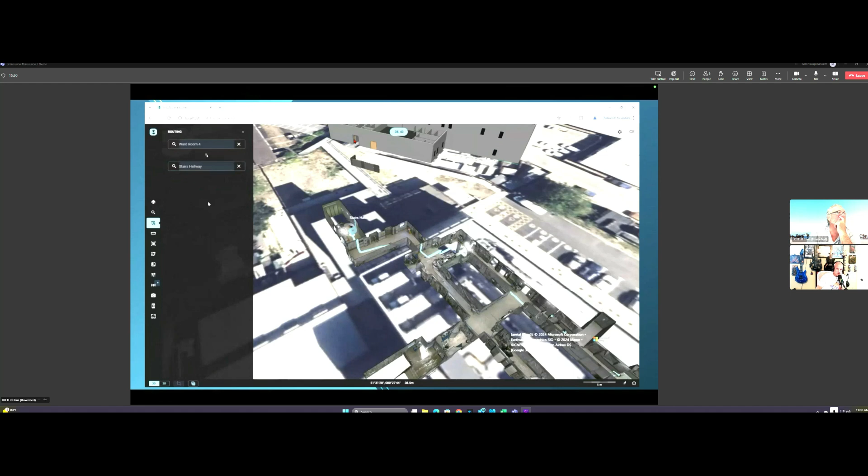So it looked like what you've done is taken the video image and overlaid it on what the LiDAR image was to create that model I just saw. Yeah, I'll show it to you in a few minutes. So what we do is create a point cloud LiDAR image, but then we have the Unity 3D engine built into our software. It's the same as what Pokemon Go uses. That's how we get to that 3D level, using LiDAR and 3D.

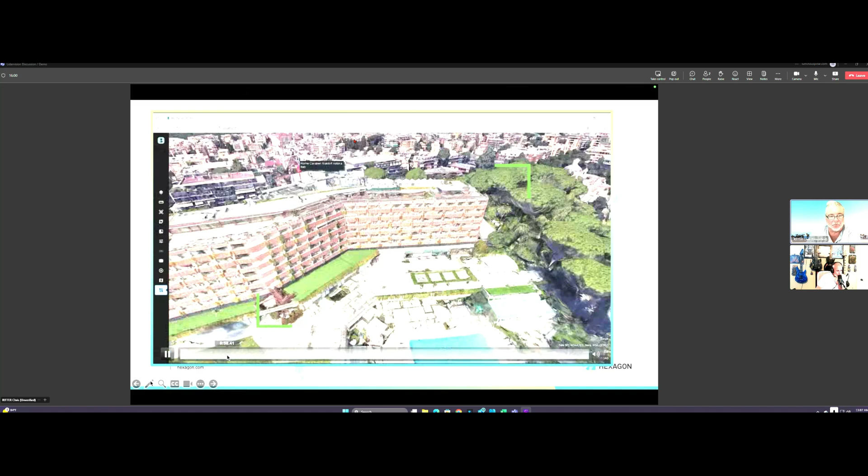And we get into even a higher level, smart sites, where we'll show you a BASF chemical facility. This is pretty neat. This is a BASF chemical plant, I think in Antwerp, that we did.

But this is going to show you not only the LiDAR, but how we bring in 3D. So this is a raw image LiDAR scan of the outdoor facility. And then we get into what we would show you, which would be... Is that what a LiDAR raw looks like? Yes, that's what the raw LiDAR looks like. And this is how we touch it up with the 3D.

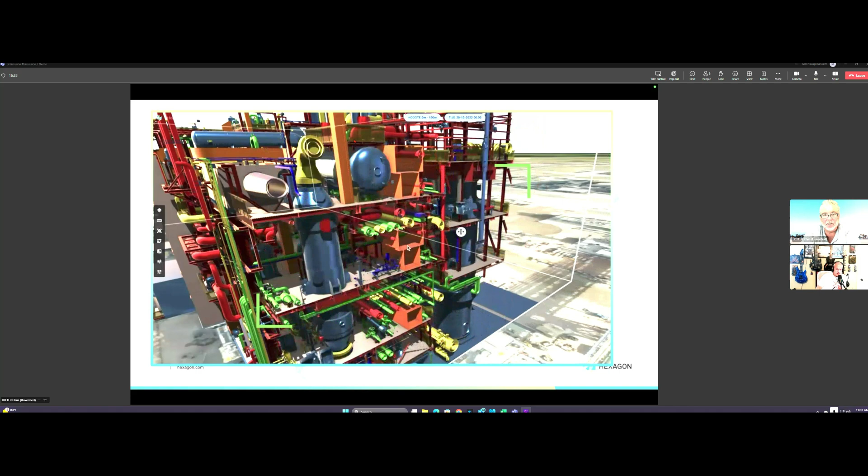So you're saying the raw LiDAR actually gives you an image? Yeah, in essence, actual raw LiDAR does give you an image. That's actually how most LiDAR companies present their solution, but we add the 3D to it.

No, I get it, that's the big differentiator. I've only ever seen it in terms of mapping, like mapping a racetrack for a driving game. Yeah, that's what a raw image looks like. I'll show you a little bit more - just millions and millions of reflection points from the LiDAR, that's it. Okay, that's exactly it, all beams, millions of beams of light coming out.

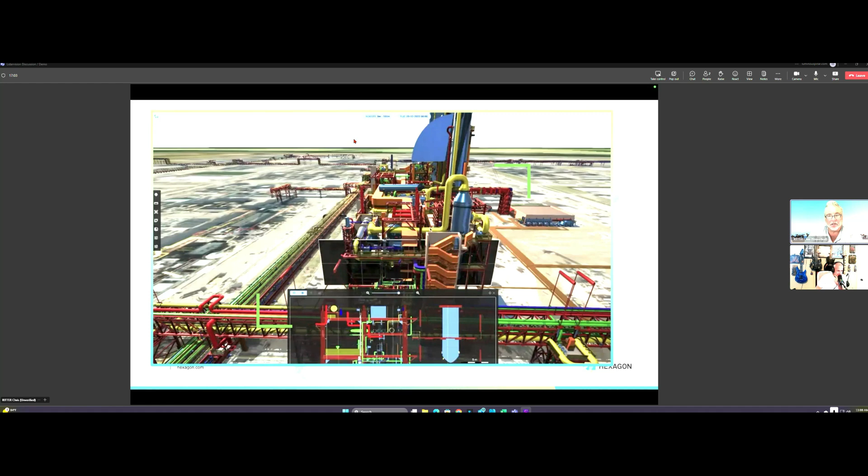And then you overlay this awesome 3D over it, and this is used for more than security - this is everything now: construction, planning, administration, whatever form of data you can bring, I can bring into this map and do this type of thing. You're erasing the plant. Yeah, and then you can pull it back the other way to complete it. This is pre and post.

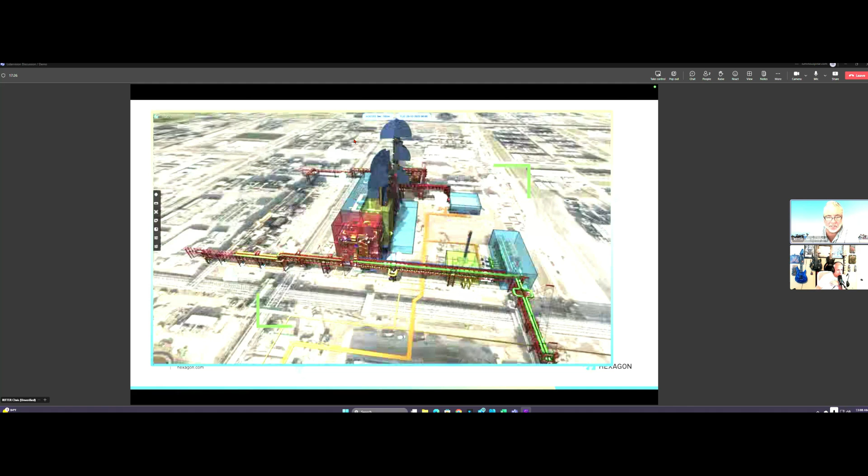So again, this is high end, almost a different division of our LiDAR called smart sites. But let me show you our meat and potatoes product and how we get to where we go with that. So we have LiDAR Vision, it is our LMS - a LiDAR management system. I keep telling people it's about LMSs now, not about VMSs. What makes us different, and what is a little bit about LiDAR.

So again, LiDAR stands for light detection and ranging. These are my features: I can do 3D LiDAR detection with full volumetric alarm, meaning I know with spatial awareness where somebody or something is, by 2 centimeters and up to 200 meters. So anywhere in a 200-meter view, I know where they are by 2 centimeters in height, width, distance, whatever it may be. I bring in the 3D maps to add to the LiDAR using our Unity 3D engine, and then I tie in my virtual planning tool and AI integration with drones, robots, whatever it may be.

Some features with LiDAR you got to realize too is privacy and HIPAA. I can now go into hospitals, bathrooms, or locker rooms and not have any concern over privacy or HIPAA because I'm not seeing a face, I'm just seeing a human. And again, 200 meters by 2 centimeters, and weather adverse - I don't care whether it's snow, sleet, rain, or hail, I'm going to see through it, where video analytics is not going to see through it. I'll send you a link to a YouTube video.

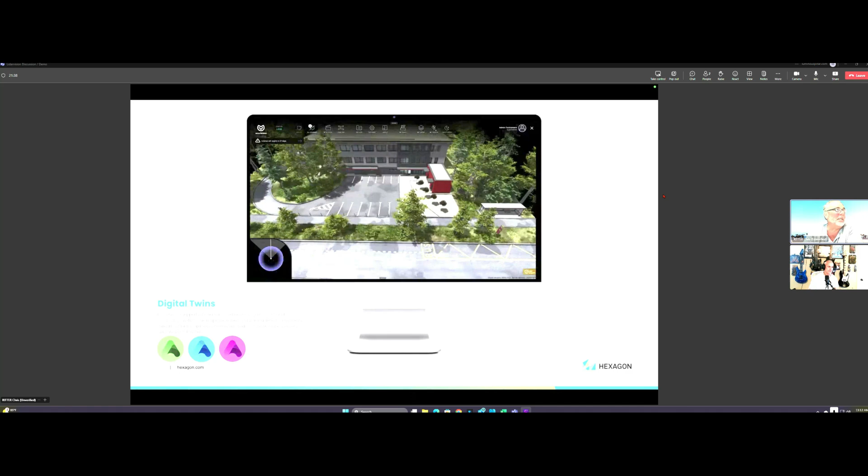So a little bit more of how we get to those digital twins. I showed you before the higher end, we just showed you a couple maps of how we do this. This is a basic setup, like a doctor's office or something like that, so it doesn't have to be a large facility. We go in, we do a scan, but how do we do this? We do it two different ways.

We have a drone, and this is why we can do these services, like I was just talking to the consultant about doing these type of services as well. The drone goes up, we have the software built into the drone, it does a grid like that. And we come down and we create a point cloud. So right here, that would create a point cloud like that. And then we would add the 3D engine to it and start doing the artist rendering.

And depending on how 3D you want, we could just do basic LiDAR or start adding in these high-end graphics like that. I'm doing a couple projects right now with private residences just like this. We showed the integrator, and the integrator's like, great, I got a rich guy that wants this. And man, he gave me a PO the other day to do it. He's like, I want stuff that looks like this.

So you don't have to have all that pretty picture imagery if you don't want to - that is the high end. You can go basic LiDAR, and I'll show you some things on that.

He's walking around now doing an internal LiDAR map. This is internal, so that's how you do it internally. That unit is a Leica unit, it is $60,000. We bring it around to the trade shows with us and scan the show floor and stuff like that. That's what creates that point cloud.

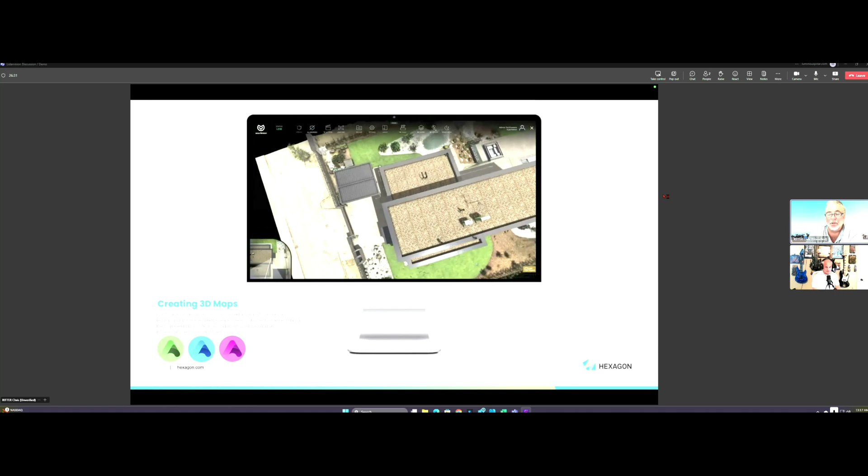So again, we can scan it, we can take Google Earth, we can also take BIM models - we can import any type of BIM and create that 3D. What's a BIM? Building Information Modeling. So most buildings already have them - they have these 3D models already as part of their construction and planning.

Like I was doing a demo for HelloFresh a couple weeks ago, and they were like, 'Oh hey, can you use our 3D maps that we already got?' I'm like, 'Dude, where do you get 3D maps?' Every time their construction company finishes building a new building, they have a guy who walks around with a LiDAR construction helmet and scans the entire building for them. It makes the job easier, and then we import it. Like this one residence I'm working on right now, this is what the guy saw.

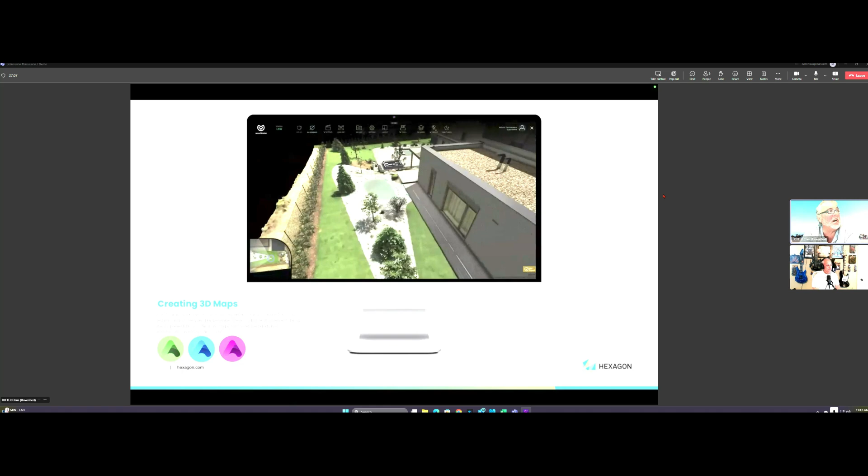Oh, I didn't even know whose private residence this is, but the customer says they want their final result to look like this. And he's got 20 mansions throughout the country.

Yeah, it was crazy. The first one in Pennsylvania I'm working on, they said they have a private art gallery, and we have to put LiDAR protection where the Sally port is, for the armored vehicles to drive in to transport the art to the Metropolitan Museum in New York.

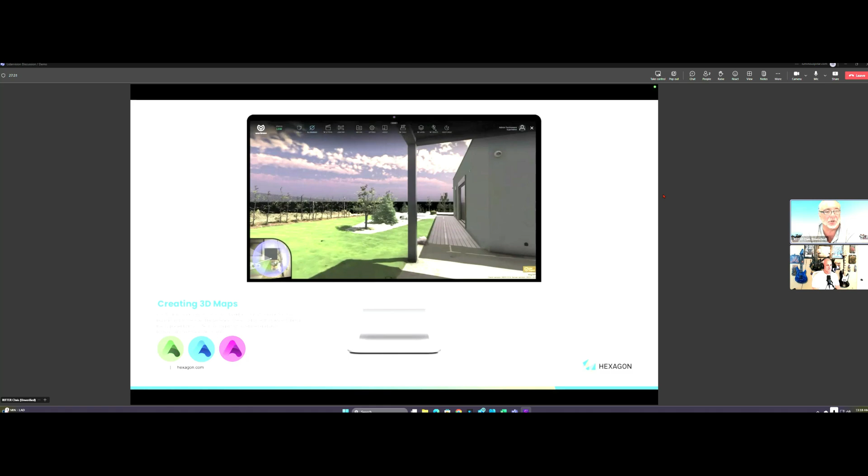Hey, go get Jay Leno's car collection, man, or some other big car collection.

Exactly, man. So the big thing with LiDAR is what we focus on is zones. I make these zones and I can create any type of zone and know who's in it, when they went in it, how many people are in it, how quick they're moving through it, and all types of details and analytics from there.

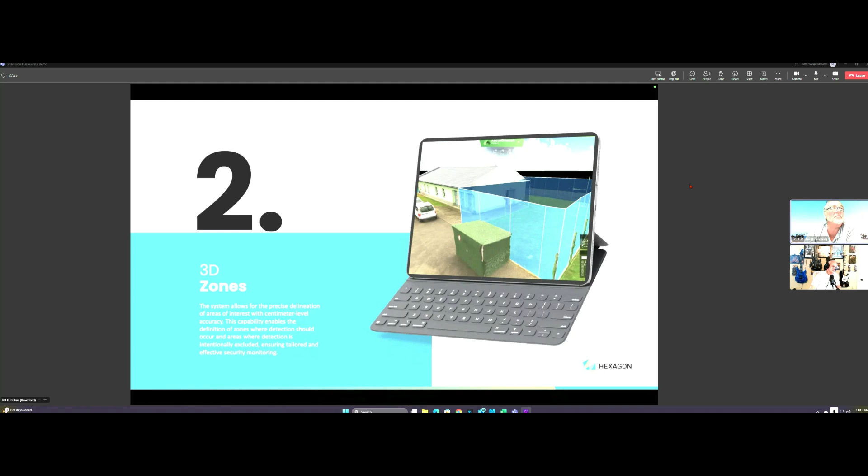Here's a zone we did for a certain customer in New York City where we did cautionary zones. This is the planning tool. Those are fake humans we put in there as the planning tool to test it. We built this line, and by 2 centimeters, I'll know if somebody sticks their finger over that line. Then we did the actual red zone, so we could stop tracks based upon the drop-in zone. We actually did some stuff in Europe where we threw dummies on the track and were able to stop the train and do the whole thing from there.

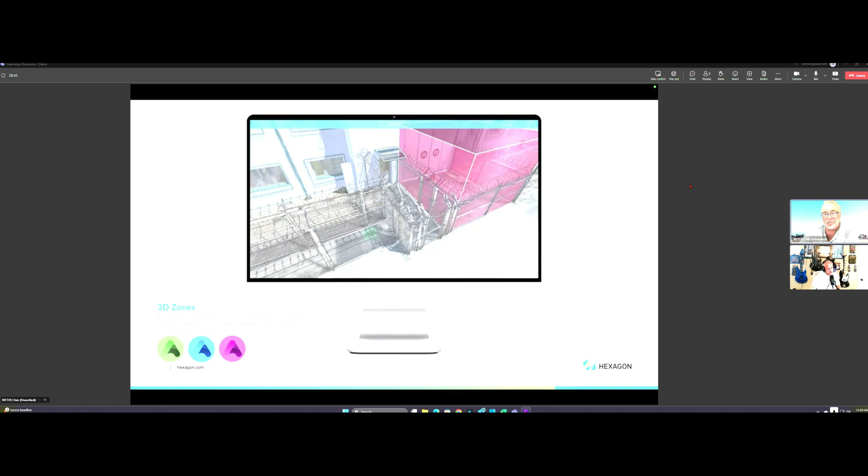So zones are big, and part of that is also doing 3D zones and volumetric detection. For prisons, I can make one zone that tells me when one guy walks in, make this other zone tell me when 20 people walk in, or only tell me if one comes in and 10 more hang in there, whatever it may be.

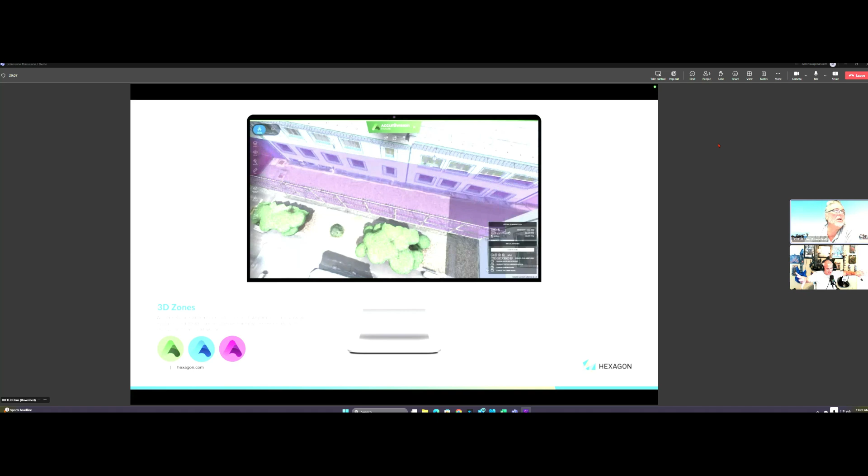And LiDAR can effectively count, right? Yes, it does people counting. The only thing it's not accurate at is a mass gathering together in a crowd. If 100 people glob together in a crowd, it's going to be tough for me to tell how many people are there. That would only work if they were spread out enough that you could get separate reflections on each person. Exactly.

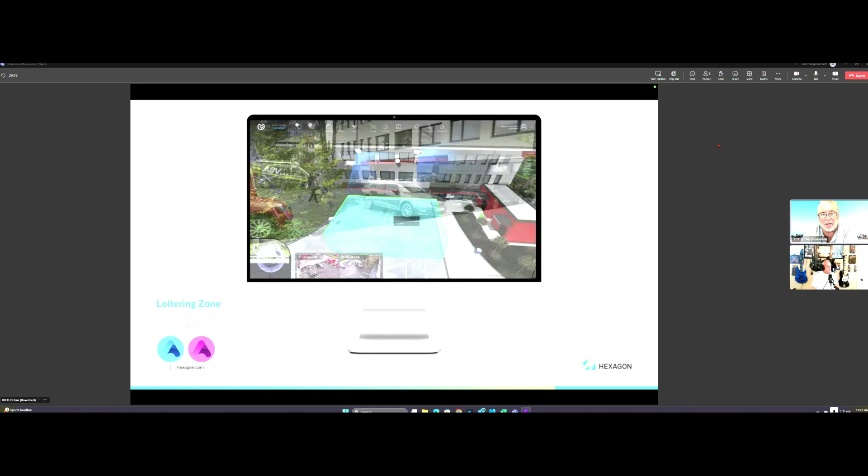Well, right now this is showing loitering zones. I can set up a grid, make that zone, and tell it I don't care if people are hanging outside the zone, but when they're in that zone, I want to know if they're lingering more than 30 seconds, 3 minutes, whatever. I can get real detailed on where they go in that loitering, so I can make that an alarm zone for all moving objects detected.

Then I can get into dangerous proximity zones. This is something I worked on for HelloFresh - tell me how close people are to trucks. When a big truck comes into the parking lot, I want to be alerted if somebody's within 2 feet of them, or if they're hanging for too long within 2 feet of them.

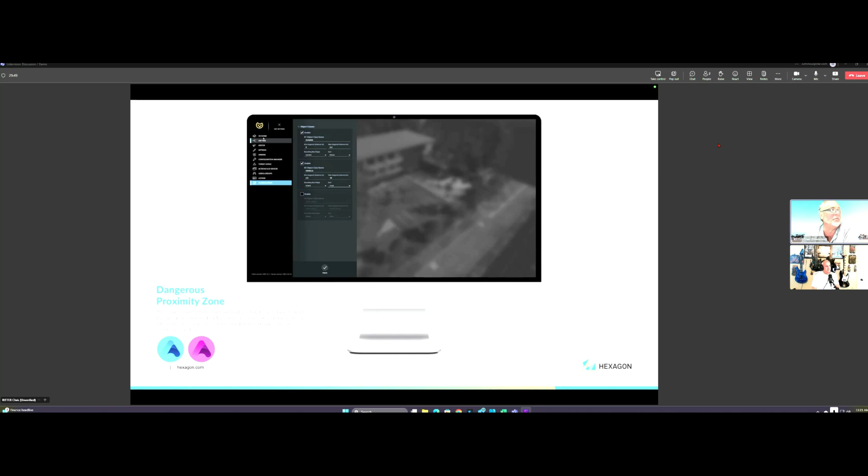So you get into the dangerous proximities, and that means I can layer zones too. Layer them all together - layer 1, layer 2, layer 3.

Okay, get into heat mapping, same thing. I can do dwell times, heat mapping. I'm working on projects right now just for marketing events for the Lincoln Center and the Pittsburgh Cultural Arts Center, for museums. Love this stuff.

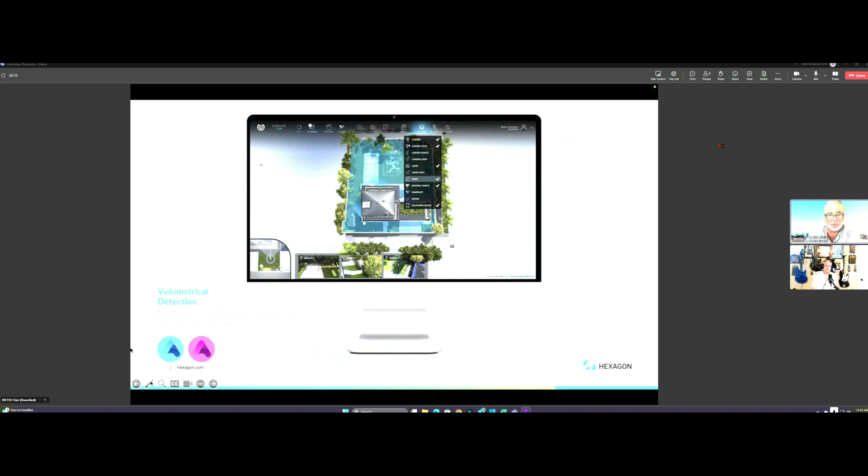Really, the thing is volumetric detection, like I said before, isn't just when they jump the fence, but what happens when they get beyond the fence. So just showing you a setup where somebody breached the perimeter, and somewhere in here we should get a lock on. Yeah, they're coming around the side of the building up there on the top right. This is showing you where they are in the scene, accurate up to 2 centimeters, where they're tracking, where they're going, with live video coordinated with it.

Wouldn't this be a great tool for heat mapping? For example, if you had an art gallery, you could use this to determine how many people go to what exhibit, what's popular, etcetera - based on literally what we're doing here, heat mapping.

For the Pittsburgh Culture Art project, they want to know if people go one way quicker or another way quicker, and how long they sit in front of artwork. Then they can determine where they need to move artwork or how to position it better, for analytics purposes.

I did a project that was never completed with Sam's Club, where they were trying to determine foot traffic through the store. As far as I know, they still don't know. You ought to find a way to talk to them, because we could absolutely do stuff like that.

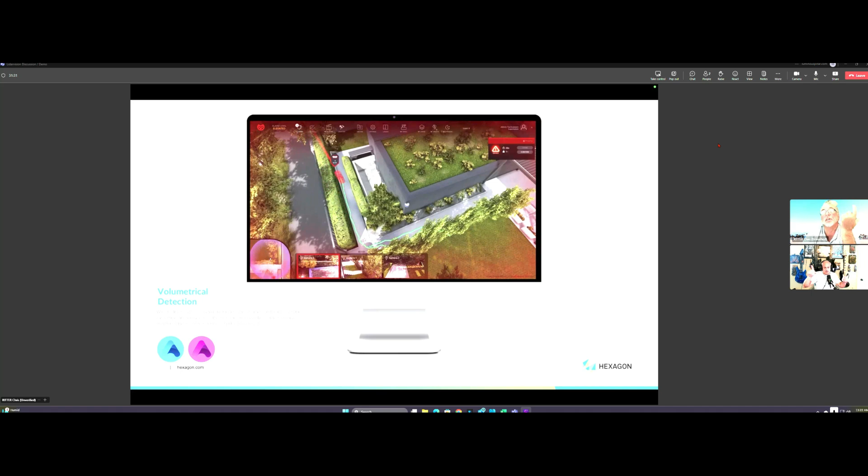They were trying to do foot traffic heat mapping. They don't know if people are going right or left or straight, and if so, where do they go, and how long do they loiter. This would answer all those questions for them. It literally would. And it's cool because it has that privacy too, so if they don't want to be sharing data for security reasons, I can get just pure analytics from it.

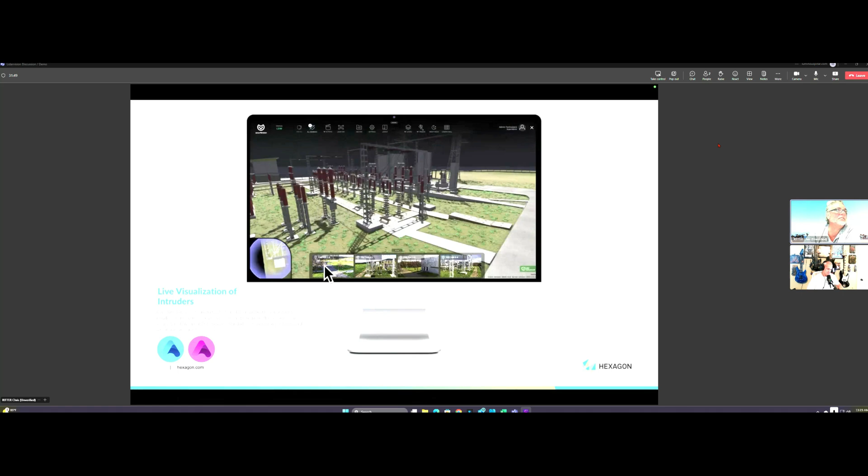Let's see intruder tracking, just a live visualization of what's going on. Then you get into PTZ piloting, so I could do point and click anywhere on the map, and then all cameras follow. Because again, I'm not looking to be a VMS, I enhance the VMS and sit next to any VMS.

I like this one right here, managing a friendly object or access control integration. I got an armed zone, I got a guy walking up in the video. They swipe a card at the gate, that disarms the zone, they're friendly. I got a friendly object in the zone now, we're good.

I got unfriendly or undetermined coming in. They come up to the gate, they don't swipe. Click - got them, I have an unfriendly object moving forward. I can track over 100 and something unfriendly objects in one scene like that, and LiDAR is so precise.

And because you are integrated with ACAP and Synergis. Yeah, okay.

Okay, so the virtual environment frame - this is neat. I told you part of that planning tool is I know every LiDAR unit, what it can do, what the manufacturer says it can do, and what we actually know it can do. Big difference in that. It's cool knowing all that, and this is how you really start planning with that tool.

So, I import the map and let me just pick out a LiDAR on it. I picked out this Ouster sensor. Now what I'm doing - there's going to be a guy on the right, I'm looking for this guy over the wall.

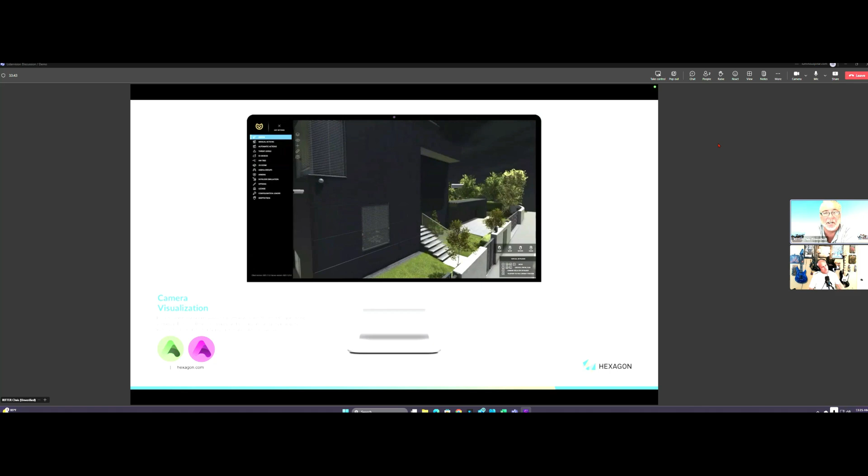Then, want to talk about cameras? I'm a camera tool too. I can even show you shading of what night shadows would look like as part of your virtual planning tool. So if you pick a camera - an Axis, a Hanwha, a Bosch, whatever it is - I know the parameters, and you can do not only night views, but it'll show you the exact field of view on that 3D map of what you'd be seeing from a camera view and from a LiDAR sensor view. Real cool on the planning.

And then again, we do the camera, we do the LiDAR, and we bring that avatar into it. I just found out we can even change the avatar into different guys, Sasquatch and all kinds of good stuff. Who cares, I mean any avatar is a good avatar.

So we have a specific client who's been working with us for a while, even before Tactic Aware was bought by Hexagon. It's a high-end integrator, all they do is private residences. I think some of the ones I just showed you in here are ones they've done. Their only business is Avigilon and us and Ouster LiDAR, and they go around to rich people. It's cool - on their website it says we tested out with a virtual intruder, we do a 3D imaging of your entire facility. There's integrators just doing that type of stuff.

It's smart enough to then be able to get this guy to crouch to see if he - oh yeah, he crouches down. Yeah, he crouches, flips, jumps, rolls, and you can crouch him down behind things there.

When my engineer does it, he does it with the Xbox controller. Like we did at the JCI show in Philadelphia a couple months ago, we scanned the Marriott Hotel, and the next day we had this avatar running around on the screen on the trade show floor, jumping on people's tables in the 3D.

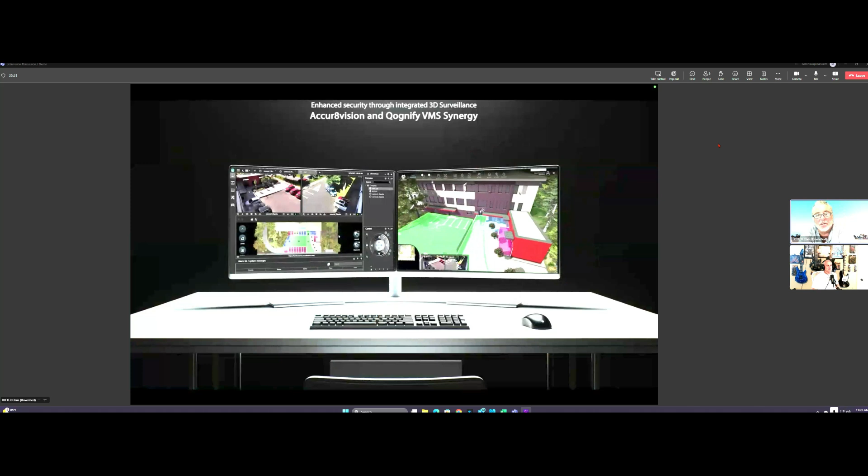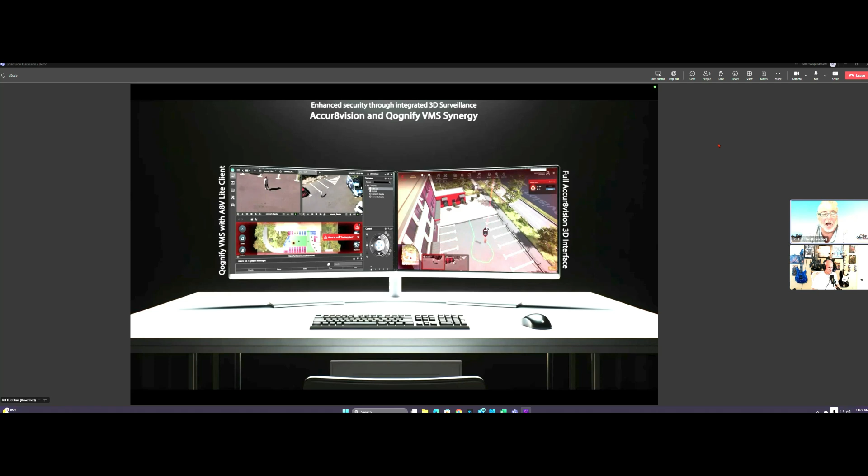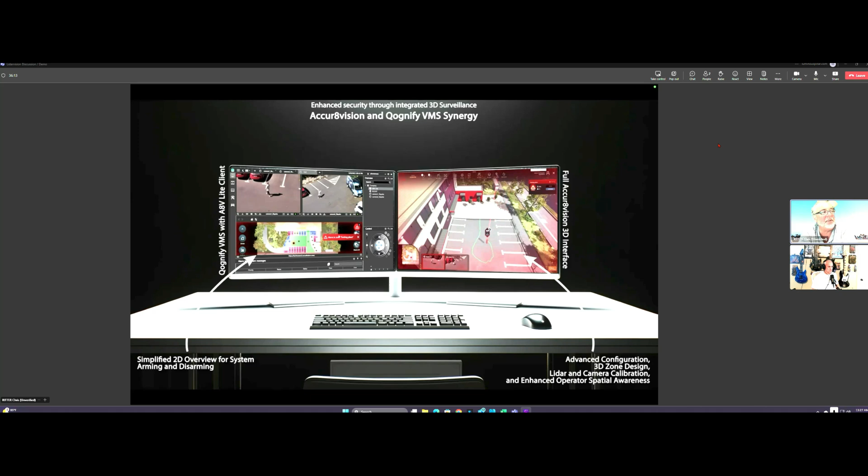Almost all of my projects today are with Genetec, or Avigilon, or Milestone. Some are with my own video - we have a deep level integration with our video, DC3, formerly QVMS. But realistically, Genetec on the left, me on the right, I would be sending alarms into Genetec, sending all the alarm data, and sending that picture of a 2D view into a tile, so it would receive a 2D view. The thing is, with any VMS, they do not have the 3D engine. They cannot do what I can do. So it has to sit side by side, but it interacts and works together with it. It's not to replace a VMS today, but hey, there's always a future for that.

We integrate directly with our 911 system, so any city that runs our on-call, we can tie directly in with that. We're showing a couple more use cases here, in addition to a fence sensor - we're not looking to replace those other forms. You can have radar, you can have fence sensors, and then tie us in, but really have that true volumetric detection once they breach the fence.

How does each of those detectors connect to home?

It's set up just like a video management system. These are all networked together LiDAR sensors, so literally just like you would design a video system is how you design our LiDAR. Difference is you have to use a Linux server for the 3D engine, and then we have these little nodes that we've actually patented, because right now LiDAR is bandwidth intensive. So we've patented a node - the engineers can explain it better - to only send the pertinent data, or the pertinent LiDAR that you need, over the network, as opposed to just everything.

So you're saying the LiDAR sensor is not a camera? No, it's not a camera. It interacts with any camera that's at that location. So how do I connect it? You showed that LiDAR in the MTA - how do you connect those back to home? Are they just RJ45s, do you use fiber, what do you use? Yeah, you do regular network connections, just like a regular video system. Okay, got it, got it.

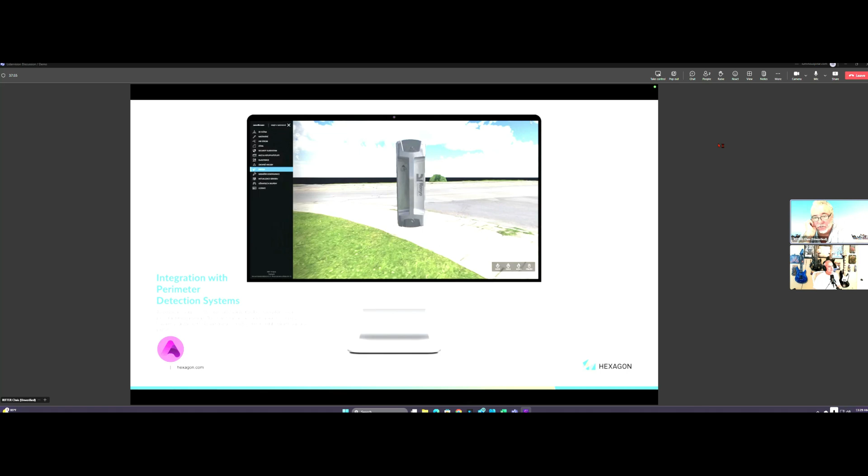I have some - I can send you out a network diagram. But again, we can go directly from RTSP from the camera, or tie in from VMS. I prefer RTSP because I don't need a third middleman of VMS to slow up the process. Full light client and mobile client, same thing though - we cannot do 3D on a light or mobile client, it's only a 2D view. The power of 3D is in a full client.

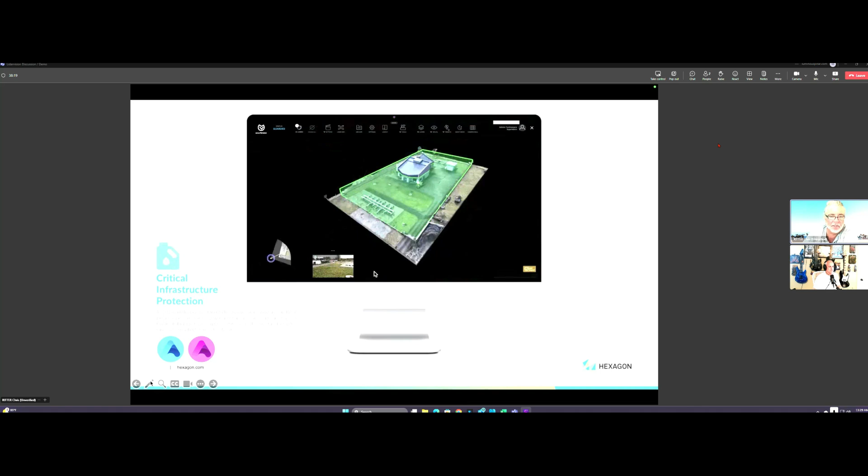And a little bit more in practice - so again, just showing you some scenarios here with critical infrastructure, tying into video. You got more critical infrastructure, prisons - I'll show you a separate live one from the Oregon State Prison System. It's actually the largest deployed LiDAR system in the country, and we do all of them for them.

Railway securities - the analytics are built into our software, so LiDAR has analytics, but we put in what we call deep detection, and it will actually detect deer versus human versus whatever it may be.

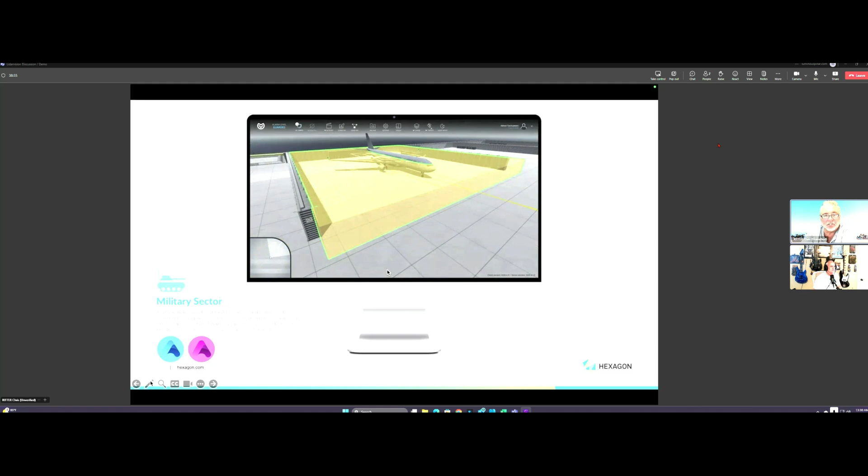High end onto the real large scale railway projects we can work on. Military sector type stuff. Public spaces, too, like the Lincoln Centers I'm working on, that type of stuff.

Now this is what I like too. Not only are we the perimeter of a data center, but I'm the interior. I've shown a couple data centers where I can track every row in your data center, put the avatar in and say, hey, this row only worker A can go in from this time to that time. They can only touch panel 2 for this time to that time. So super granular on what we could do inside a data center with humans and where they can touch, what row they can touch. Those grids I showed you, I can make a grid on every single box in there.

We have rapid deploy systems, so we've got stuff we can do for military type sector, or this is something I've shown to the utility companies. Actually just got off the call with that consultant about this. They want to start adding it for temporary events, where we can go in and not have to do the full 3D modeling. We can quickly set up a LiDAR type scenario here to do a rep.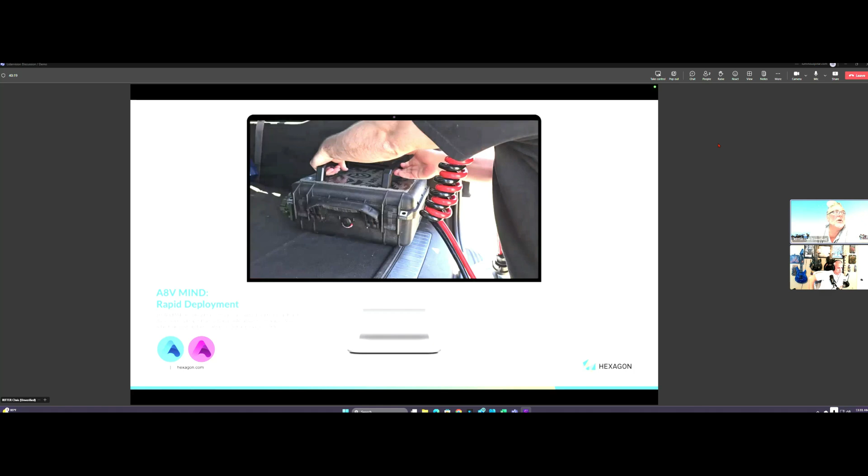Oh hold on, I'll show you. So this is what it looks like once you get it set up, like a raw image. You don't have to have that full 3D map or video, you can set up a quick LiDAR sensor with a pole to protect some outdoor areas. This is our Pelican we do for trade shows, things like that.

All right, let's get into a couple things you wanted to talk about. Drone dock integration. Any type of drone, I can tie into it. Once the LiDAR sees an alarm, our software will talk to the drone, control the drone, and fly it to the alarm point, then start streaming the LiDAR and video from that drone back into the system.

So that's drone dock integration, but what you were mostly asking about was drone detection capabilities. We are detecting drones, we're detecting basketballs, baseballs, things thrown over prison fences and whatnot. This shows you a full 3D view, real drone detection. This is the 3D mapping, and it'll show you the actual breadcrumb trail in the sky where that drone's coming from or going to, the speeds, and where it is in space.

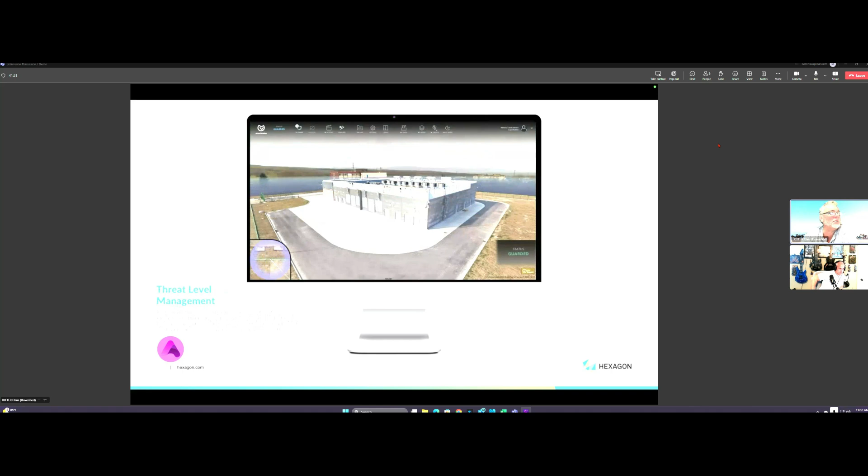Threat level management - again, I could do any type of lockdown scenarios based upon alarms coming in, shut things off, make it into workflows. Just touching on what I talked about before, being able to really detect, using our software, objects - whether it's a deer running through a scene or a human in the scene. What you're seeing right there is really what those other companies' LiDAR looks like, like if you called Aeye or Blickfeld or any of those partners, because that's the difference.

We are the open architecture management with 3D. Other LiDAR companies use the raw data, the point clouds - the accuracy is there, but they just don't have that 3D modeling to add to it. Just getting into the detection of deer versus how we know things.

And adverse weather - that's something I talked about before, really filtering snowfall, filtering fog, filtering rain, any of that type of stuff, or absolute total complete darkness. We have the tools built in to do that. Because again, this is what we're looking at with LiDAR - that's what a LiDAR's like, yeah, it really tells you the difference.

You got the idea, I got the idea. Now, why don't we switch directions?

Can I share my screen? Let's see here, share screen. Will you let me share screen? I believe so. Okay, let me pull something up here. There we go, okay.